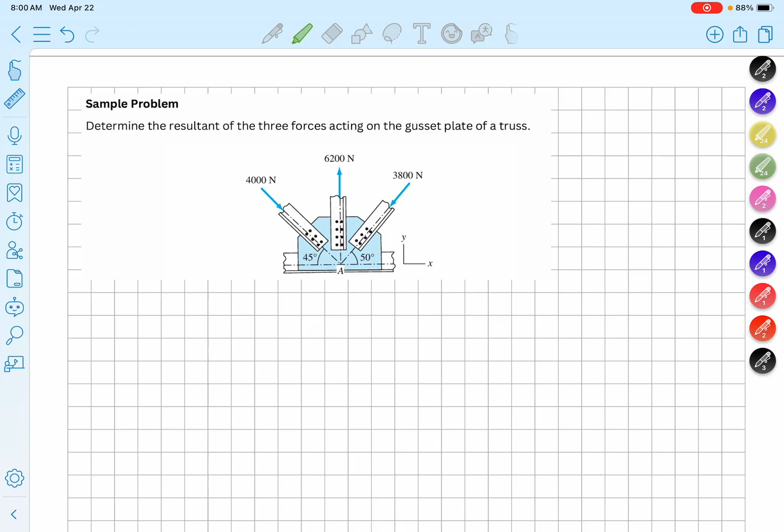Okay guys, for sample problem number 2, we're still in concurrent force system. Determine the resultant of the three forces acting on the gusset plate of the truss. So we need to get the resultant, plus the direction or position.

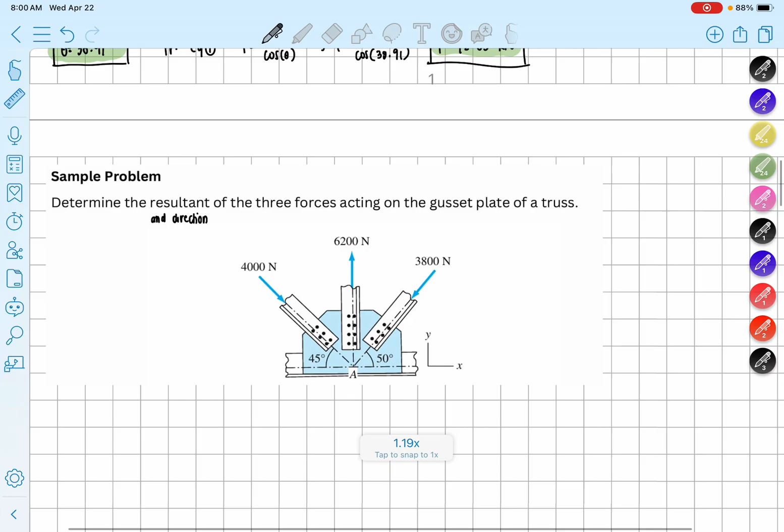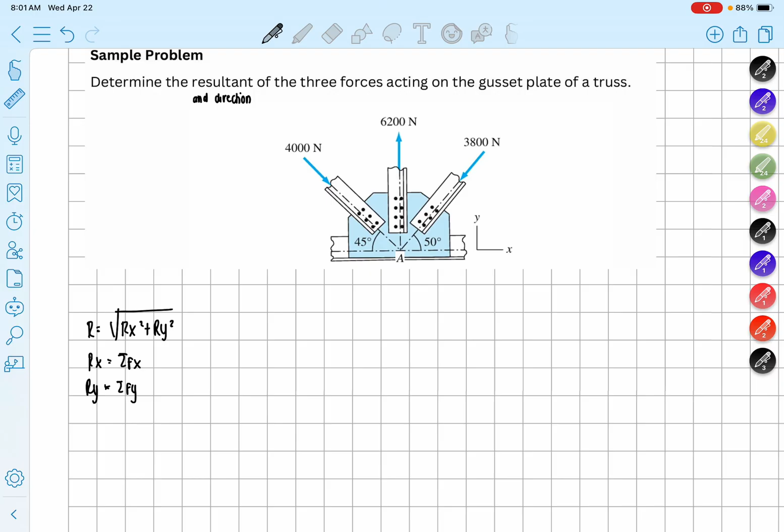So what do we do? Guys, when resultant is being asked, write the formula right away so you don't forget it. R is equal to square root of Rx square plus Ry square, where Rx is equal to the summation of forces along X, and Ry is equal to the summation of forces along Y. In this case, it's simple, we just need to find the resultant. Separate which ones are which.

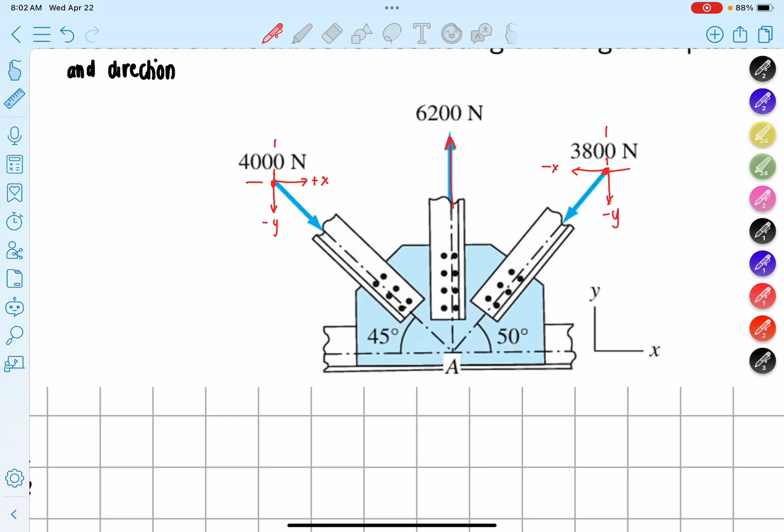So for this force, 6,200 Newton is along the y-axis only, so technically it won't produce an x-component.

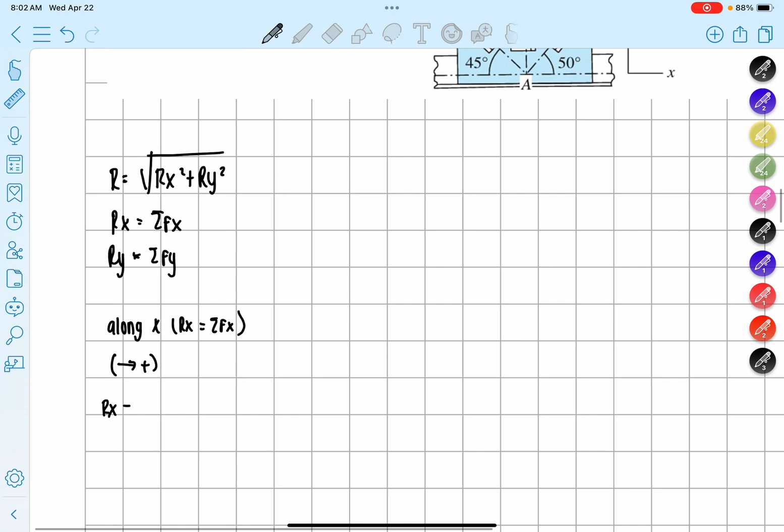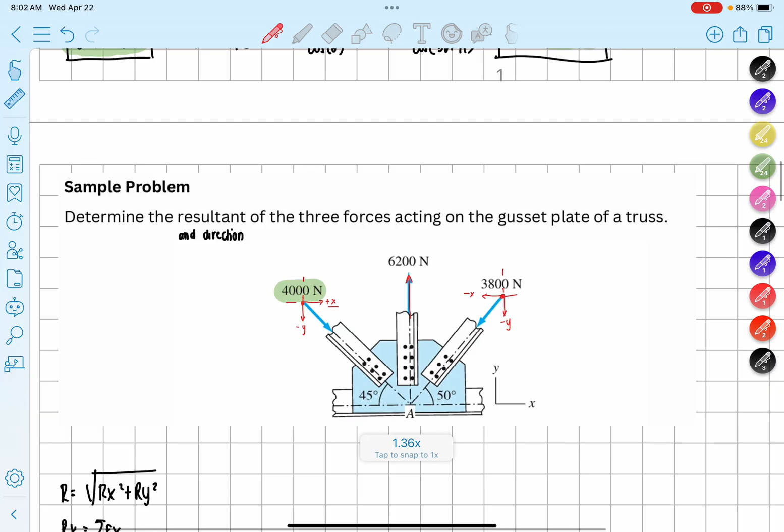So let's see, for Rx first, let's prioritize Rx. Along X first. We have Rx is equal to summation of Fx, and let's treat positive to the right. Let's go one by one, starting with 4,000 Newton. 4,000 Newton along the X, if you look at it, like I told you, it's positive there.

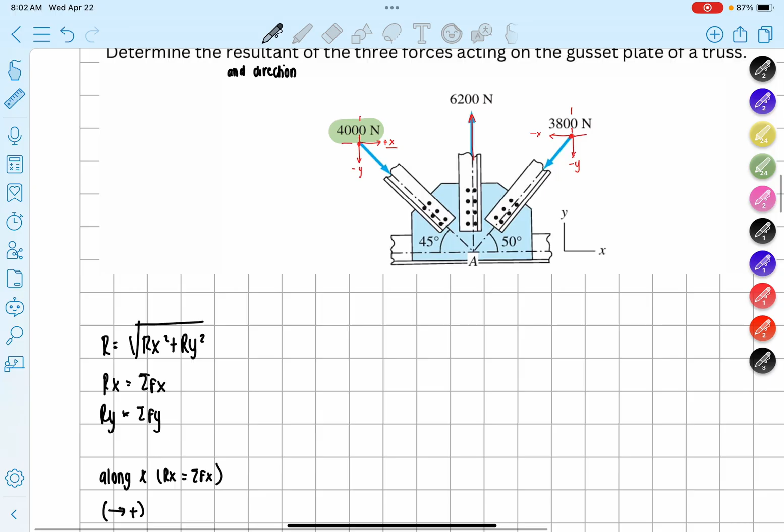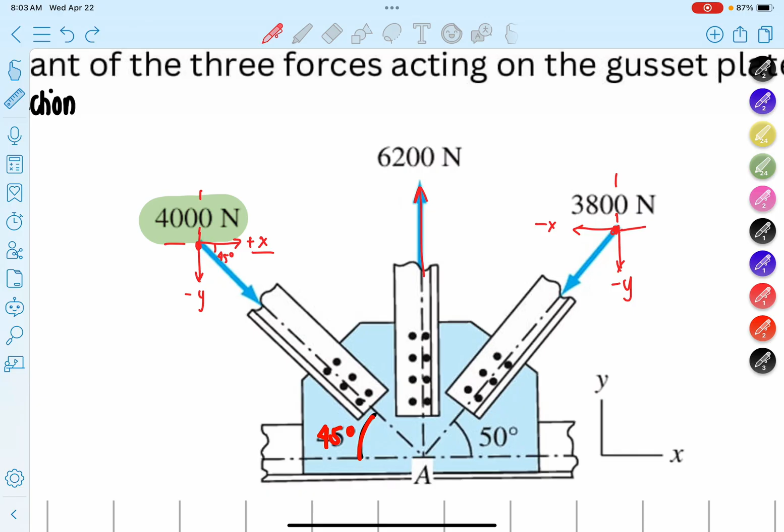4,000 - always remember, what's the angle? If you look at it, this is 45 degrees. How do we get the corresponding angle? This is also 45 degrees. Got it? Draw a parallel axis, then the angles are the same. You already get that part, but we recalled it anyway. So the 4,000 Newton is inclined at 45 degrees from the x-axis, meaning this is cosine of

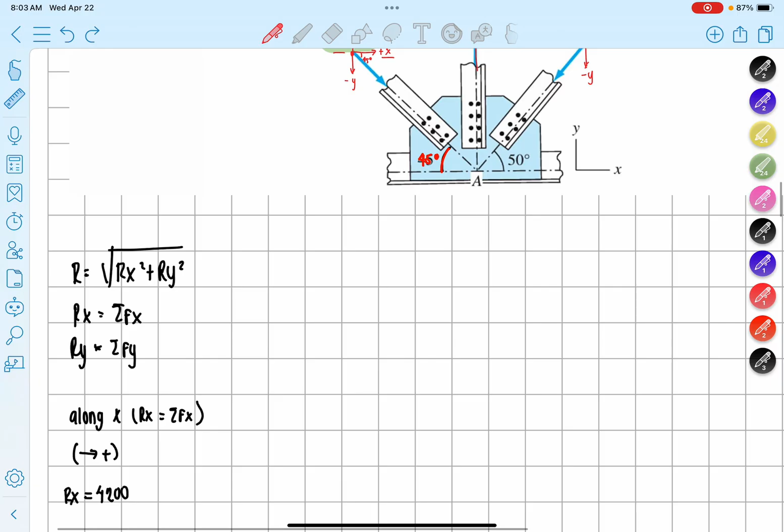45 degrees. Now let's look at the 6,200. Did you see any x-component here? None, because its force is directed along the y-axis, so that's done. Let's move to the 3,800. The 3,800's horizontal effect is directed to the left, meaning it's negative x.

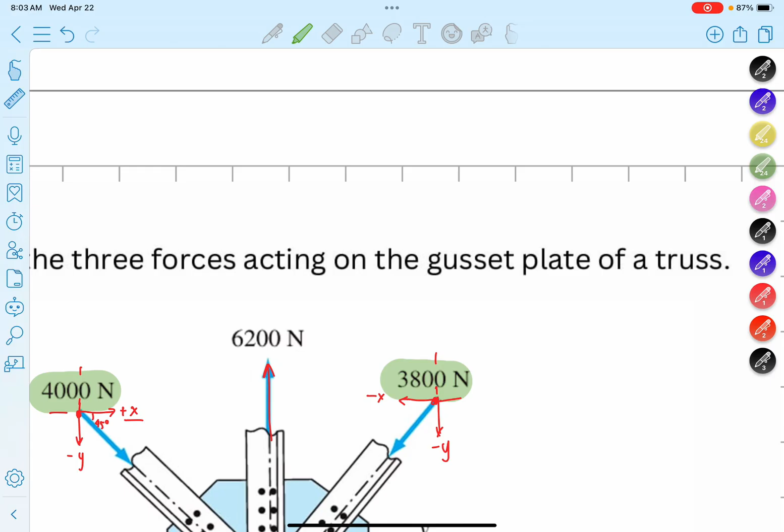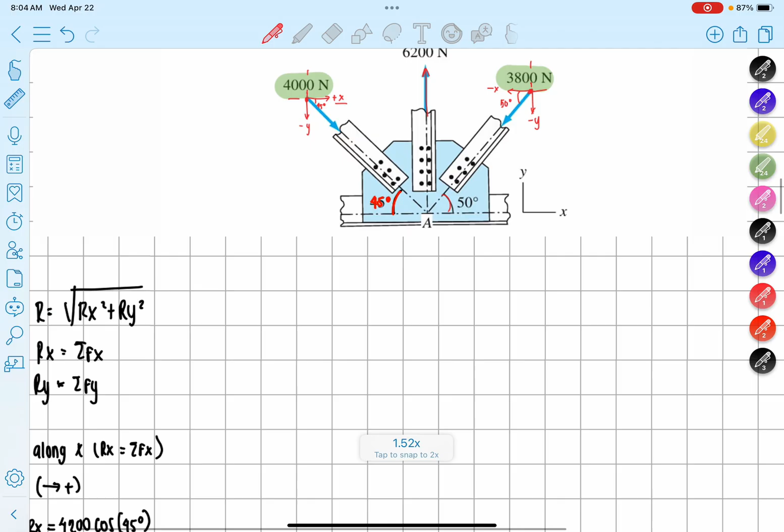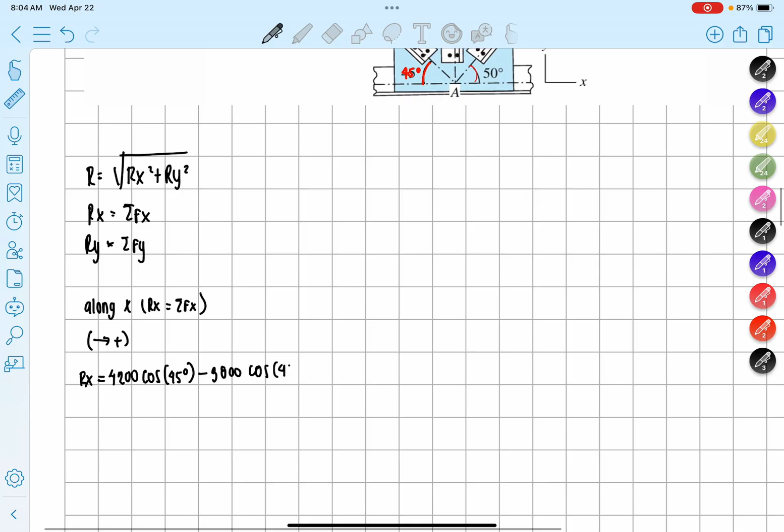What's our angle now? If this is 50 degrees, what is this now? This is also 50 degrees. So the 3,800 is inclined 50 degrees from the x-axis, so this is minus. We have 3,800 cosine of 50 degrees.

Let's simplify that. Rx, please double check on your calculator: 4,000 cosine of 45 minus 3,800 cosine of 50. Sorry, I made a mistake, this is 4,000, not 4,200. So the answer comes out to 385.834 Newton. So that's our Rx.

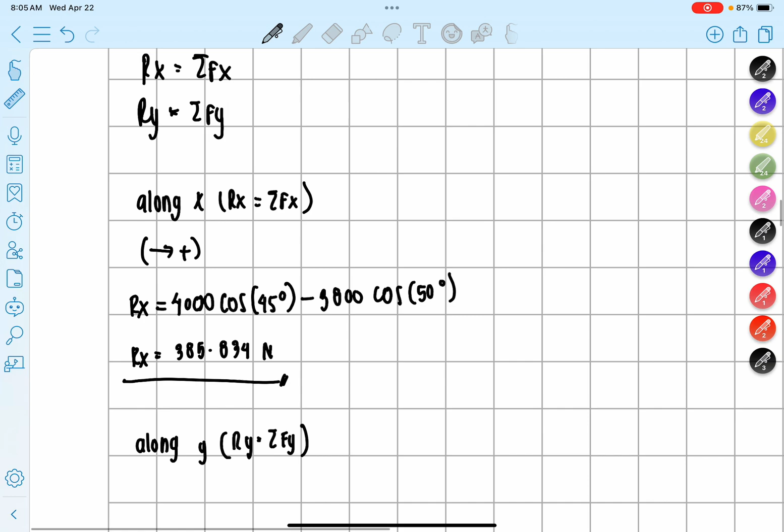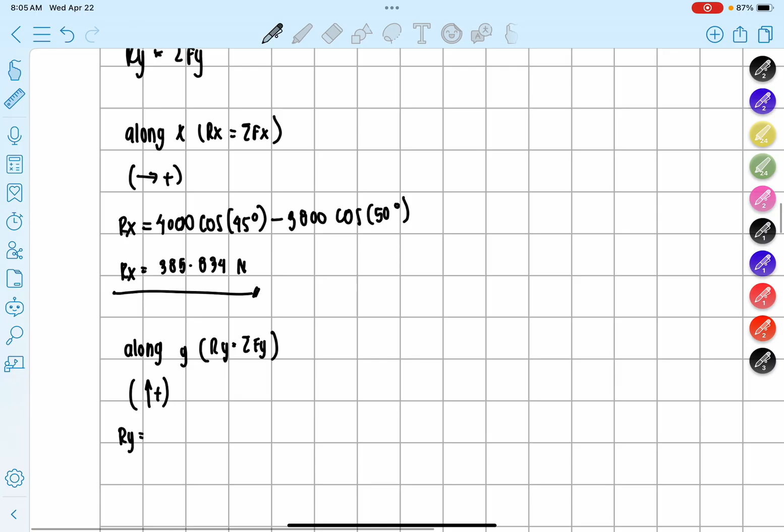Now along Y. We have Ry is equal to summation of forces along Y, treating upward as positive. Let's go one by one. For 4,000 Newton, the Y is negative there since it's downward, so negative 4,000 sine of

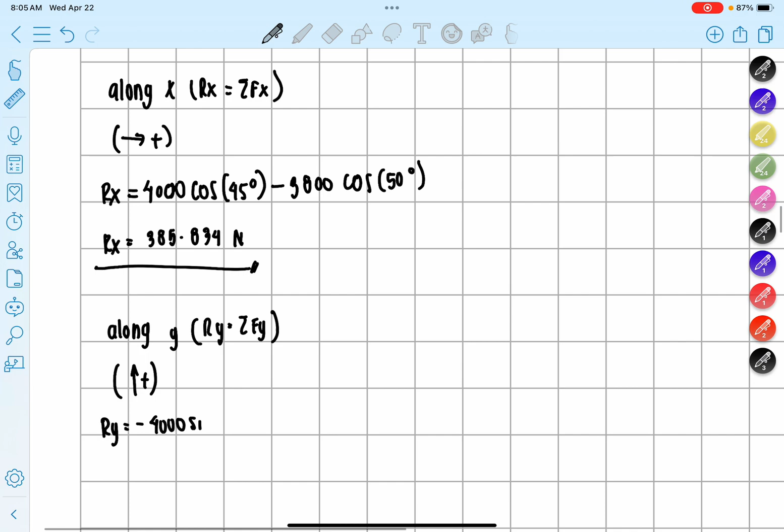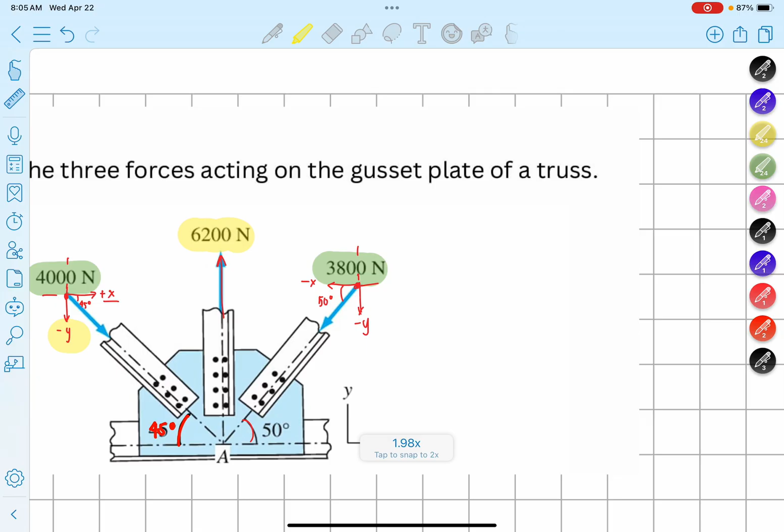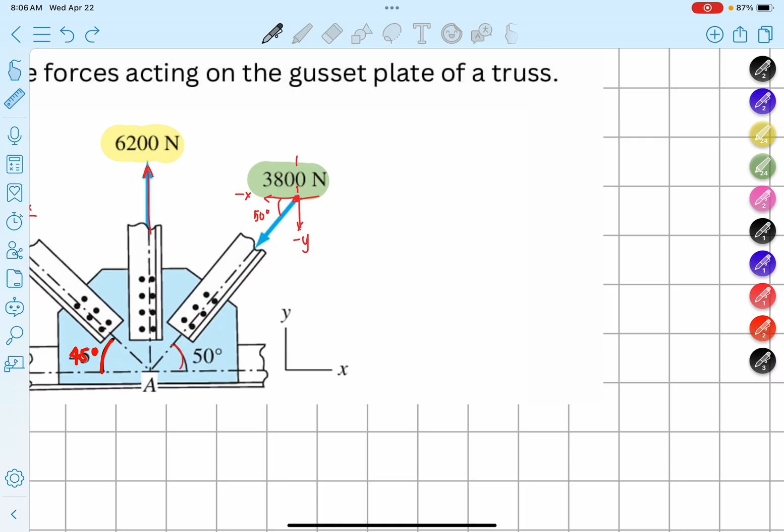45 degrees. Now let's look at the 6,200 - does it have a component already? We can include it directly since its force is already directed along the y-axis, so plus 6,200, since it's upward. You don't need to take its component since it's already along the axis. Now look at the 3,800 - its y effect is still downward along the y-axis.

So this is negative 3,800 sine of 50. So Ry is equal to negative 4,000 sine of 45 plus 6,200 minus 3,800 sine of 50, which equals 460.604. So this is our Ry.

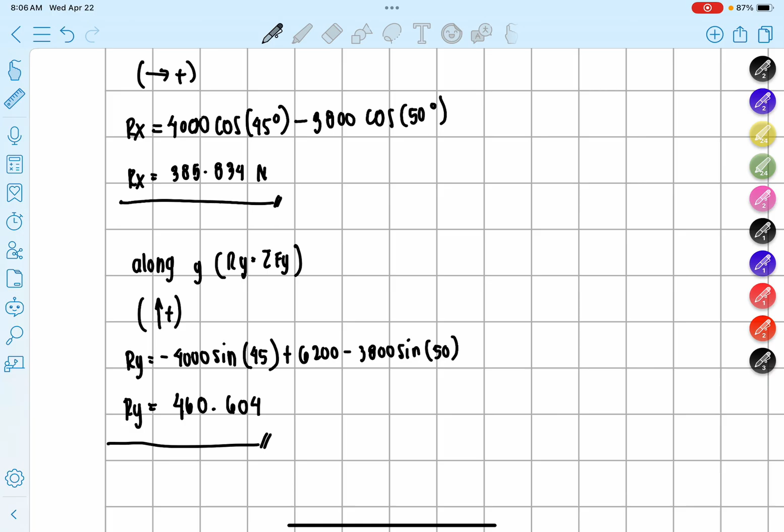To get the resultant, R is equal to square root of 385.834 square plus 460.604 square. So the resultant is equal to 600.853 Newton.

If we get theta, this is arctangent of Ry over Rx: 460.604 over 385.834, which equals 50.048 degrees. So the answer for direction and position is 50.048 degrees.

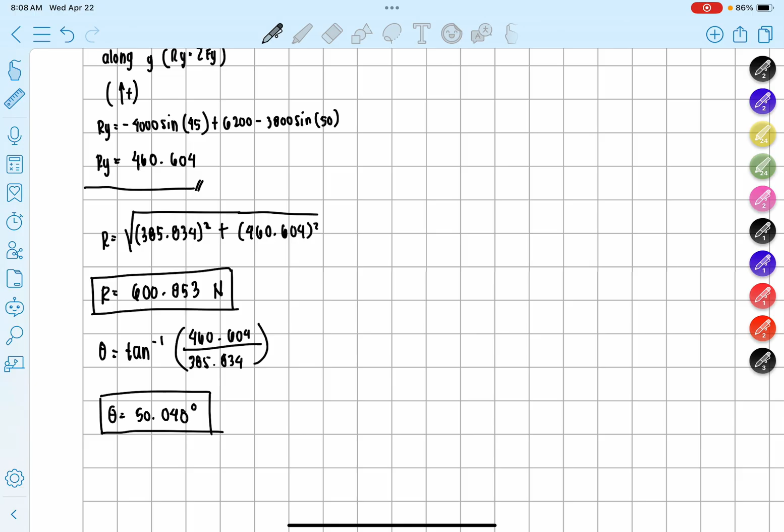And this is 600.853. Okay? Understood. So that's it.